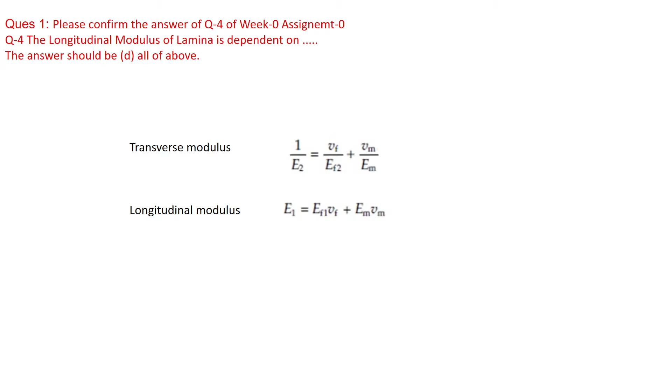So let me introduce myself. I'm a fifth year research scholar. I'm a Prime Minister Research Fellow and I work on developing composite cylinders at IIT Kharagpur. So this is a doubt-solving session of the NPTEL course named Introduction to Composites. And I'll start with the first doubt.

So it was posted that the fourth question of the week assignment had the answer as D, that is all of these. So yes, you're right. The modulus of any composite depends on the properties of the fiber as well as matrix. So if you are trying to calculate the property of the entire composite, you will take the percentage of fiber, percentage of matrix, and the properties of fiber as well as matrix into the formula. So this is the formula which is used, and as all these three properties were there in that question, definitely the answer would be D. That is all of these.

Does anyone have a doubt in this question further? Okay, if not, we'll switch to the next question.

So in this, one of you asked, are cemets fibrous or particulate composites? So it's actually quite a nice question. I mean, you can learn a lot out of it, as you don't actually categorize a composite as fibrous or particulate individually. Composites are mainly categorized into broad categories. One is on the basis of the reinforcement materials which are used, and the other one is on the basis of the continuity in the entire composite. I mean, one would be the materials which you are using for making that composite, and the other would be continuity.

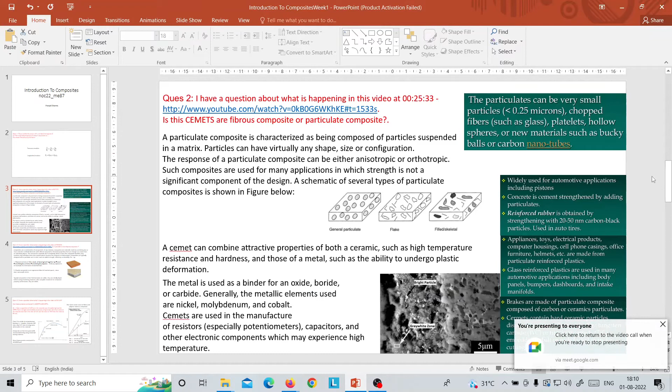Anyways, so now I'm moving on to the next question. So the next question was, is it possible to have liquid composites? So the composites with which I have dealt till now were all solids. Well, the basic concept behind designing a composite is you have two different materials. Both have quite different properties. One will have high strength while the other will just bind everything all together. Or one will have high strength while the other will have quite good electrical resistance or heat resistance. So that's the reason we make composites.

So it's actually possible to have liquid composites, like research is going on it, but typically in commercial use all the composites are solid because during manufacturing we may have a liquid region. Once we solidify it or harden it in order to obtain the desired property in a composite, most of the composites which exist around us are all solids.

Okay. So I hope this question is also clear. Then these are some examples. For example, plywood is a composite. In this, wood is there which acts as the reinforcement, and we have phenol formaldehyde or urea formaldehyde which acts as the glue system which binds all the wood layers together.

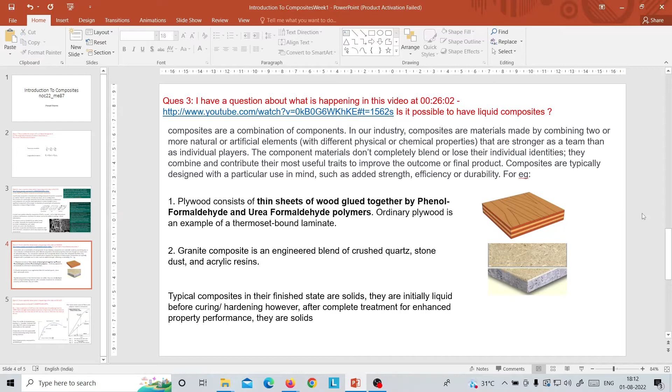So again, in both of these cases, the raw materials used were one solid and the other one liquid. But the final composite which was obtained after hardening and post processing was overall solid. So that's it. So do you have any other doubt relating to this question? No? Okay, then I'll move to the next question.

This question is also quite interesting. In this, one of you has asked that in this video at this particular time, the professor explains that when the strain rate is higher, then if we have fibers, they have higher modulus and strength. So let me first explain to you what is strain, strength, modulus, and everything.

So this is the typical stress and strain curve which we obtain on mechanical testing of any solid substance. So we have this curve. This one would be the initial section, that is the Hookean region. Then this is a typical curve of a metallic body. But if we talk about fibers, then fibers only go from here up till here, then they yield at this particular point and they break here.

So how do we calculate the yield strength? We take the initial strain, then at 0.2% of this strain we draw a parallel line up till here, and then we see the intersection. The intersection of this stress strain curve with this 0.2% strain line which is parallel to this particular line would give us the yield strength.

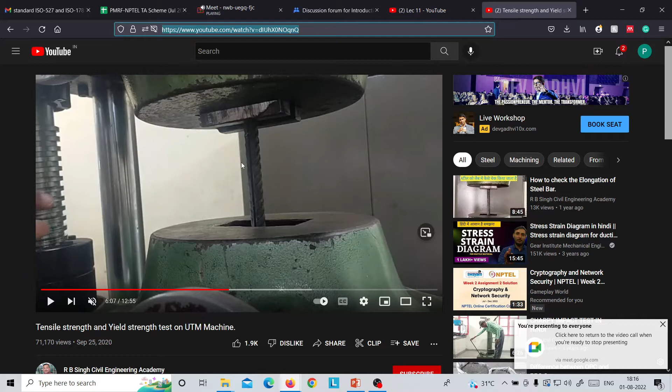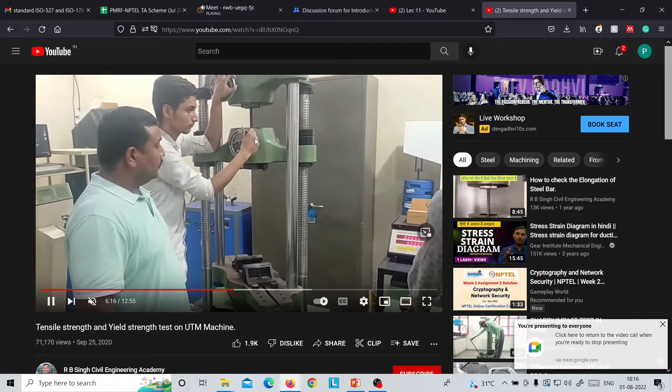Okay. So in that case, this is the UTM machine which is commonly used. So as it's seen here, we place the sample in between and then we stretch this machine. This is the fixed surface. Well, there can be two kinds. One we can stretch downwards, and the other one. So we apply tensile stresses at a particular strain rate, like load rate, and then we get the stress versus strain curves.

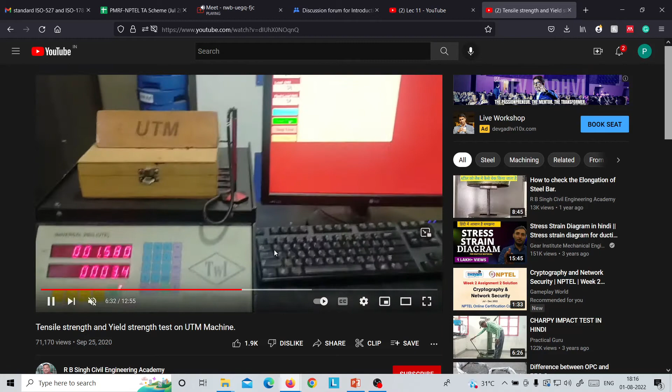So in this video, I just found a normal video from YouTube. In this, they are trying to test the tensile properties of a steel cylinder. So we can see they start increasing the load and they can see a change in the strain.

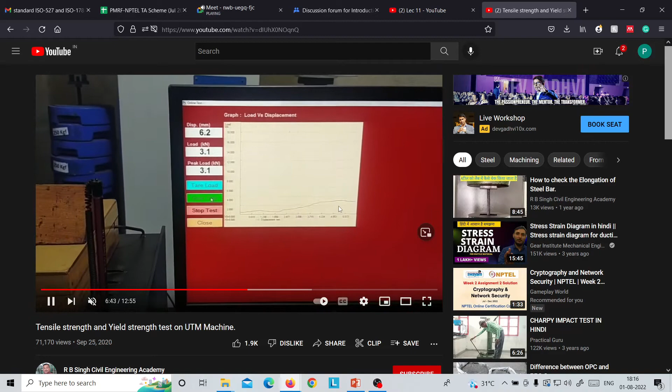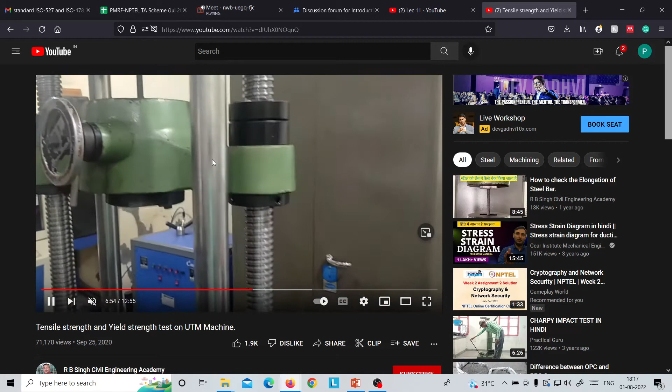So this graph is rising gradually, and the rate at which the load is applied, that is the millimeters per minute of shift in this load cell, would be the test speed. So we can have different test speeds as per our UTM machine. It could be something between 0.5 up till 14 millimeters per minute. And using this, we can have the tensile test results.

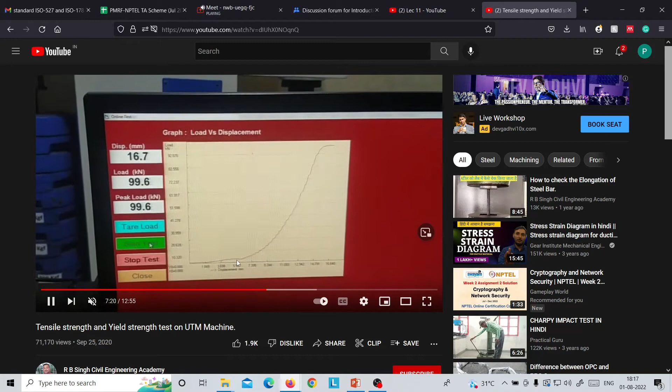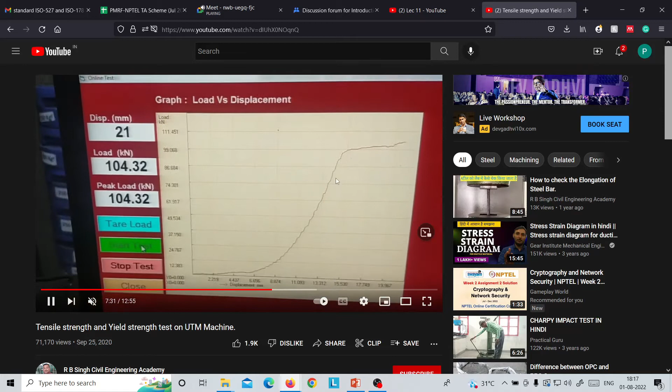So we can see we are increasing the load this way, and the load is increasing and the strain is also getting generated in the system. So this is almost a straight region. This is the Hookean region which I was talking about. So we can see here the graph starts changing. So here is the point somewhere where yield strength will occur, and from here it starts deforming, and we can see it will break. After some time they'll show that it breaks.

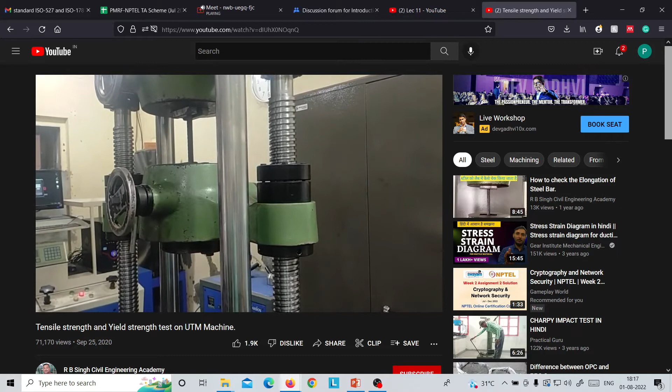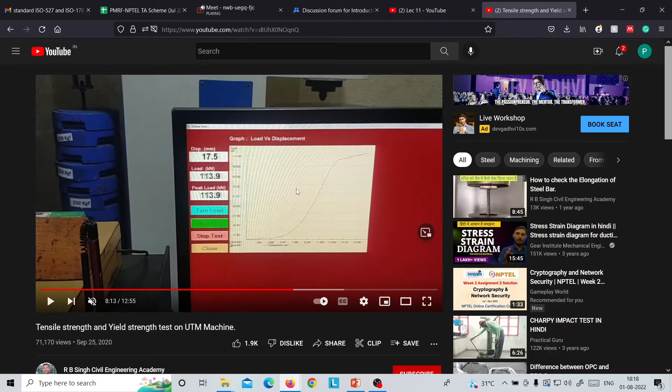So the stress at which it breaks would be the break strength, while the stress at which yielding starts, that is when we see a change in that stress strain curve, would be our yield strength. And if we want to calculate it, then yield strength would be when we take the same slope as this straight linear line and we shift the strain by 0.2%, and then the intersection with this curve would give us the yield strength. So the yield strength and modulus are determined using this method, and a higher strain rate typically means that we'll increase the test speed.

For instance, in this experiment, the test speed would be around 2.5 mm or something similar. If we suddenly increase the test speed from 2.5 up till 14, then the strain rate would increase a lot. That is what Sir was talking about. That is, in case 2, we have instantaneous loading. That is, in a small amount of time, we can obtain larger strain rates, which are required for the testing, which leads to break. Then fibers will give higher modulus and strength as compared to other materials.

I understand, even if we give an instantaneous impulse kind of load, still the fibers would not fail that early as compared to other materials. So that's why they are preferred for designing high performance composites.

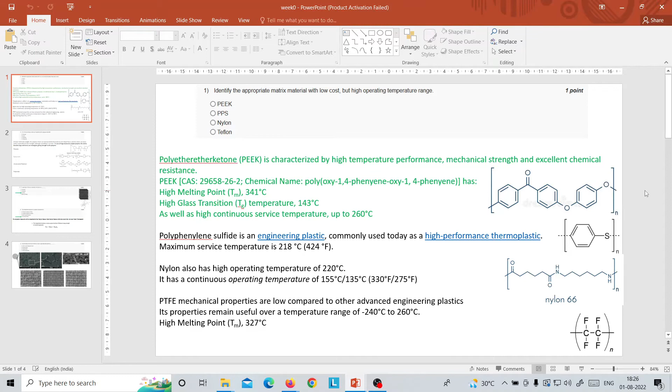So from these observations we can see that PEEK as well as Teflon both have almost similar melting temperature and operating range. However, this one is the most low cost and high operating temperature polymer matrix because its chain is most suitable for operation. Okay, is it clear? Okay. Yes, ma'am. Anyways, I'll move to the next question.

So in this they've asked which one of the following will have highest strength. Again, strength also depends on cross-linking. When we compare all of these together, the ones which have straighter chains will have the highest cross-linking, which is very uniform. When it comes to strength, crystallinity also plays an important role.

That's why when we are talking about epoxy resin, it has many oxygen groups, so there would be hydrogen bonding. The chain is also comparatively straight, so cross-linking would be more well arranged, and that's the reason epoxy has higher strength. When we choose commercial composites, the composites made using epoxy as the glue resin have very high performance compared to the other ones.

While epoxy is comparatively costly, the other types of resin normally used are polyester and phenolic. Phenolics have very high operating temperatures. The composites used in spacecraft, for the external surfaces of aircraft, or bodies operating at higher temperatures are made out of phenolic resins, as they don't melt even at 1200 degrees Celsius. There can be exceptions, but most grades of phenolic resin don't melt even at 1500, 1600 degrees Celsius.

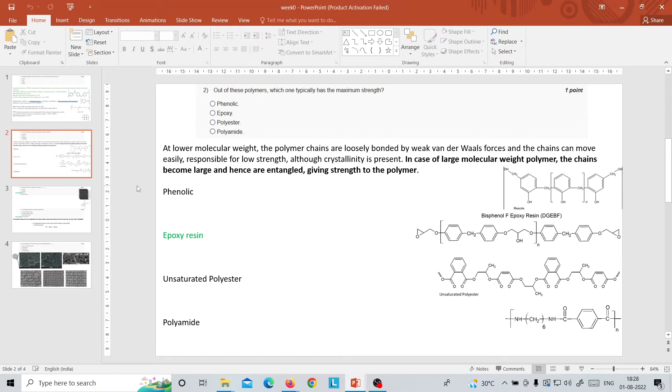Then the other assignment was: which of the following is the terminology used for single layer fibrous composites? So it's quite simple. Lamina is the term which is used. When a lot of laminas are placed over one another, then this entire stack is known as laminate.

Then this I have already discussed in this doubt solving session earlier, as the longitudinal modulus of the lamina depends on all these three properties. So that's why 4 is the right answer.

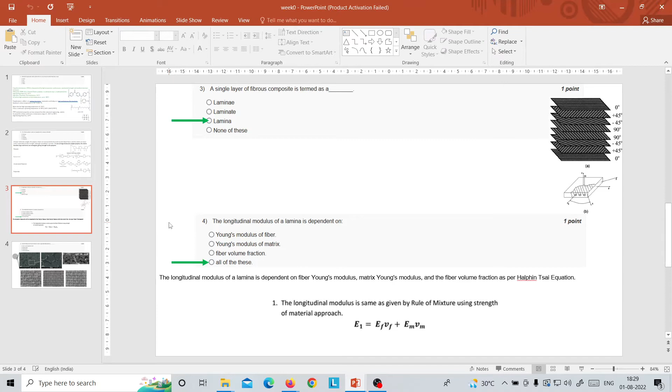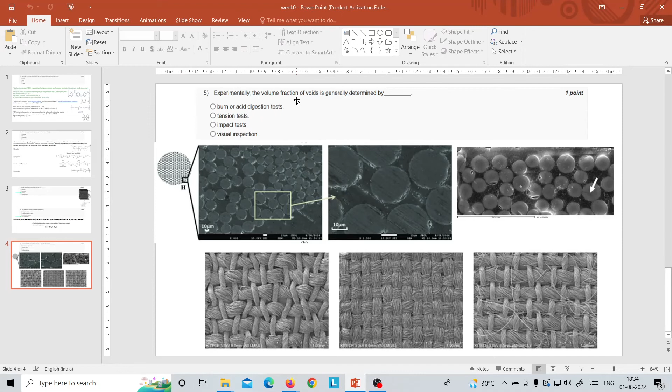as well as fiber. So when we compare all these three masses together, then using simple mathematics, we can simply estimate what would be the percentage of voids in this composite. So that's why the answer to this question would be first, that is burn or acid digestion test. This is commonly known as loss on ignition test when we are dealing with composites. It's quite famous as a process, and you'll learn about it in your final year BTech or masters maybe.

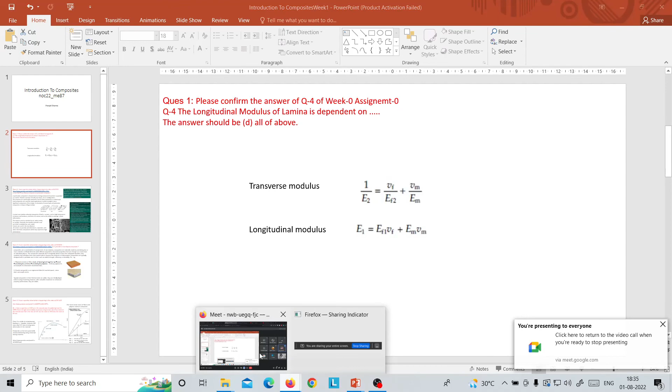Is there some theoretical stress concentration factor? Just a second. Is there another terminology for theoretical stress concentration? Actually, I'm from chemical engineering, so my terminology is a little different from mechanical engineers. Does anyone know what is theoretical stress concentration? We have come across this point, but I'm not actually getting your question.

Actually, we make an epoxy resin model, and on a photoelastic bench we stress this. The experiment is conducted on a photoelastic bench, and light is passed through that model, and then depending on the number of fringes, we can conclude how much stresses are raised near the vicinities and irregularities in cross section. So my question is, is it correct to use an epoxy resin model instead of metal?

If you're trying to determine the properties of epoxy, then you'll use epoxy. If you're trying to determine metal, you'll use metal. However, the problem with metal is that the normal universal testing machine, that is the stress bench which you're talking about, has limits to its stress load, that is the maximum load which it can apply for causing failure. For example, the machine in my lab is around 30 kilonewton. So if you are trying to break a metal using a 30 kilonewton machine, and its thickness is around 5 mm or something similar, it's actually impossible.

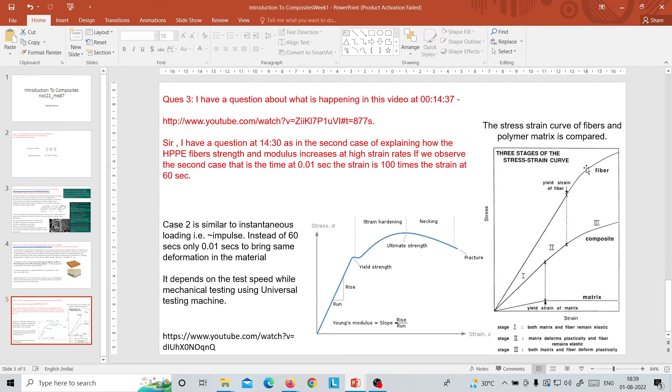And that's why I think while doing the experiment, they used epoxy resin instead of metal. The only reason was non-availability of that large capacity of load cell, or else it's not at all viable to have stress strain data of a particular material and use it in a model of some other material. Are you getting my point? Is it clear? Yes, ma'am, clear.